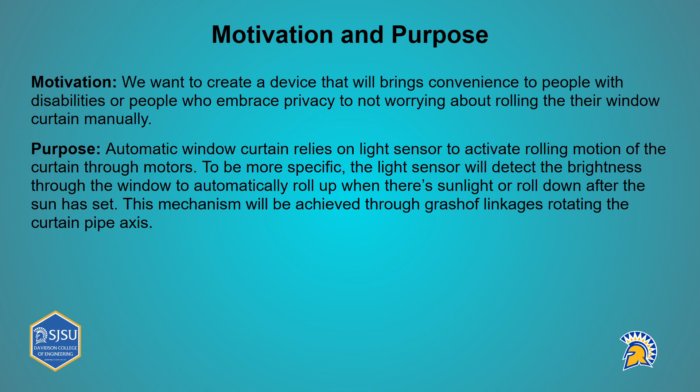Moving on to how the mechanism of our automatic window curtain system works. There will be a long pipe which forms the central axis for the curtain. The two ends of this pipe are securely connected to one side of the hubs, providing stability for rotation. The links are paired and connected using ball bearings and pins, allowing smooth movement. One end of these links is fixed to the wall, while the other is attached to the opposite side of the hubs, creating a stable yet flexible structure.

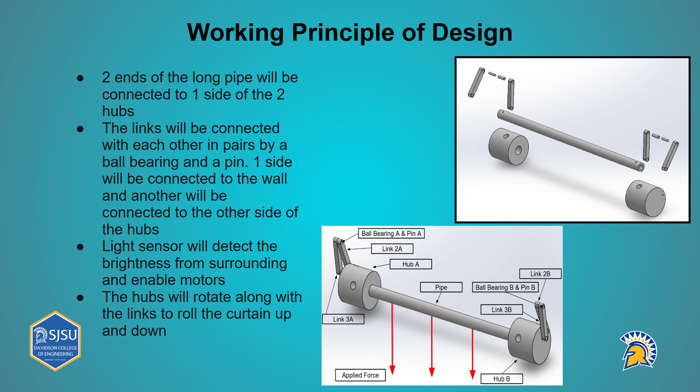For the automation part of the device, a light sensor is used to monitor the surrounding brightness. The sensor provides a signal to turn on the motors when it notices variations in light intensity. Finally, the hubs will rotate along with the links as the motors are activated. This rotational motion is transferred to the pipe, enabling the curtain to roll up when sunlight is detected, or roll down when it gets dark. Since the rotation is based on the Grashof linkage system, it ensures smooth operation and user convenience, making it a practical solution for everyday use.

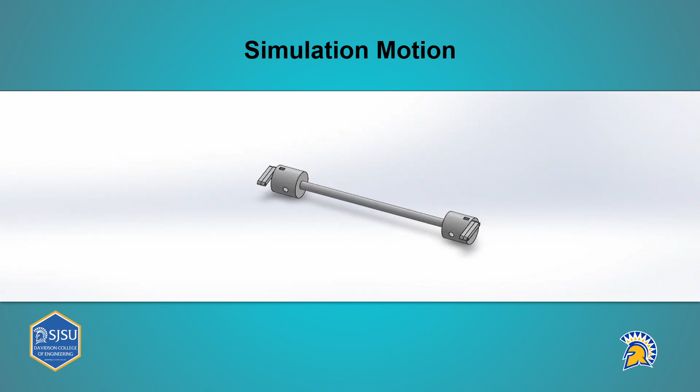This video shows a simulation of how our project will move. It will retract the curtain in one direction, or unravel it in the other direction. This will be done by attaching the outer links to motors, which will be activated by a light sensor. The goal is for the assembly to rotate the curtain in either direction at a speed of 60 revolutions per minute.

When it comes to the quality function deployment of the curtain roller, it is best to utilize a House of Quality tool in order to set and define parameters as a team for our mechanism in regards to our customer requirements. This tool is a product planning matrix built to show our customer requirements and how they relate directly to the ways and methods we would ensure those requirements are achieved. This will ultimately lead to customer satisfaction and loyalty towards the curtain roller due to its reliability and efficiency.

Efficiency will be obtained by understanding the customer to a better degree and breaking down the detailed engineering specifications needed to meet their requirements. These specifications are meant to be measurable and can be developed from design experiments and analysis. This tool also compares these same specifications with other companies with a similar product in the Now section, in order to help justify our own ratings in the House of Quality for the How section.

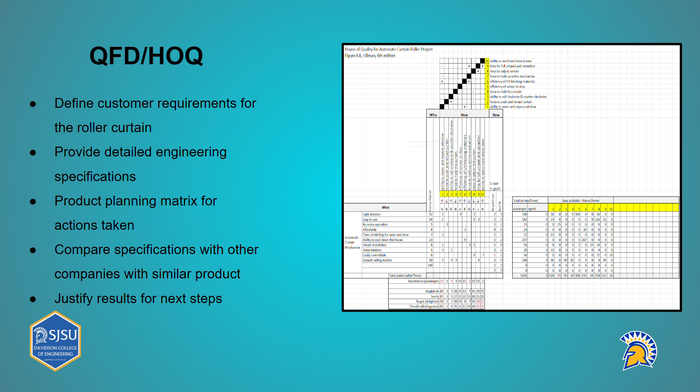The Now section is a rating between 1 through 5, where 1 is a bad rating and 5 is a good rating. The How section is a rating of either 1, 3, or 9, where 1 is a bad rating, 3 is a decent rating, and 9 is a good rating. This ultimately all comes together to show how our product aligns with the requirements and specifications needed for a curtain roller, along with comparing these points with possible competitors to show the customer why they should pick us over them.

Moving on to the kinematics of the curtain roller, the main focus was ensuring the rolling motion of the mechanism. This includes both the clockwise and counterclockwise direction for rolling up the curtain as well as unraveling it. Once this rolling motion was considered, the next step was focusing on ensuring that the mechanism had proper load distribution once it was fixed in place by the support of a wall.

This proper load distribution was then implemented by splitting the components of the mechanism into A and B categories, for the sake of equally distributing the force being applied along the pipe of the curtain roller. Since the team decided to manufacture the roller curtain at a PVC rigid custom, it was decided that links attached to a hub would be the best method of providing the drive needed to make the roller curtain function.

This material being utilized meant it would be cheap and easy for the team to manufacture due to the availability of the material and capability of this material being 3D printed. In the assembly of the curtain, then lies link 2, link 3, the hub, the ball bearing and pin that joins them together, and lastly the pipe to bring their overall A and B components together.

All these components were given basic dimensions such as diameter, thickness, and length in metric units. These metric specifications and dimensions were then set and justified by the team in respect to our requirements set in the House of Quality. Each component on the image to the right of the slide was then given dimensions in order to create their counterparts, and then fully assemble the mechanism to provide our team and the customer a visual aid to help understand the intended kinematics for the roller curtain, and also provide insight on what makes this design unique from our competitors.

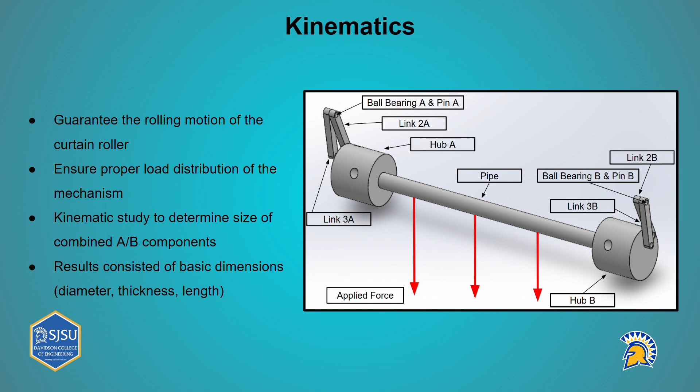In this slide, we showed the logic behind the bearing design. Some of the assumptions we came up with were a 20 Newton axial force and a 120 Newton radial force. We also included a 10 millimeter bore, assuming light impact, 99% reliability, and a speed of 60 revolutions per minute. And because we assumed that the curtain roller would be operating at room temperature, it was obviously going to be much less than 150 degrees Celsius. We also assumed that we were working with inner ring rotation.

So, applying all of these assumptions and boundaries into the tables, we calculated the total load life of the system. This resulted in about 2 times 10 to the 6 hours. This is a pretty high figure, but some of the reasons for that include an overabundance of caution, as well as a somewhat lack of resources for our particular design. If we were to go through with physically manufacturing this, we would go with a bore much smaller than what the chart displayed information for, or perhaps not even include one at all.

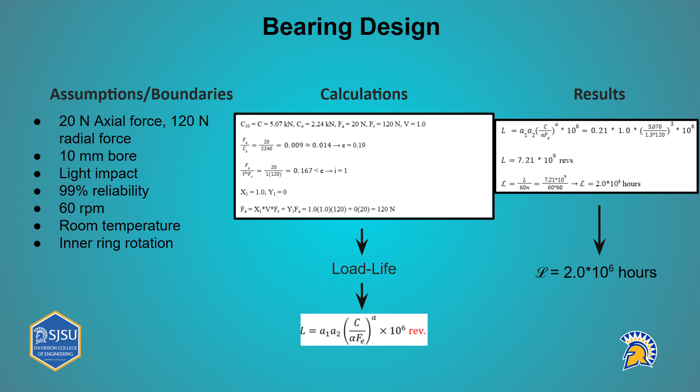With stress analysis, we did several things here. The first thing was we assigned the material, which in this case, we did a PVC that was custom made. That way we included the yield strength to this material assignment, as well as the thermal expansion coefficient. Then after that, as we move on to the mesh generation, you can see that we created a mesh to allow us to have the most accurate simulation possible with several thousand nodes and elements involved. We also have in there the direction of the forces. As you can see, we applied a 20 Newton force load to the PVC shaft in the center.